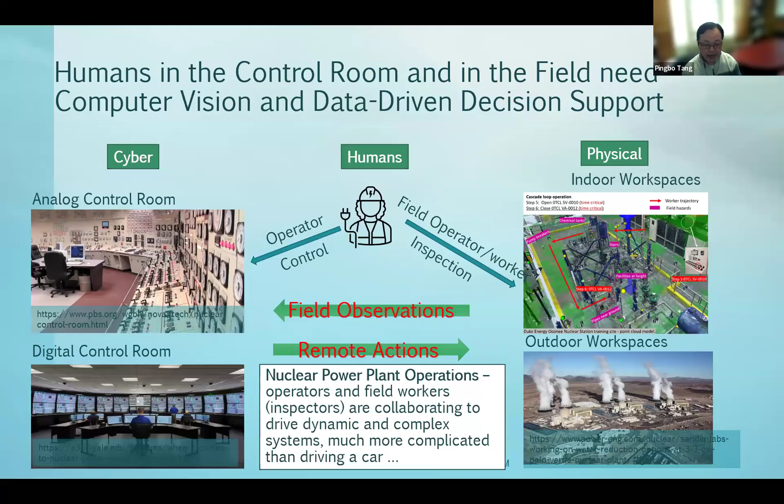Now, the big challenge is there is an interaction between the physical space and the cyberspace, and the humans in the control room and in the field need to collaborate. They need to communicate very well to enable remote operation in an efficient and safe way. So efficiency is important, but at the same time, reliability is also important.

We need to make sure that in the control room, the person who is doing the job is checking the right thing at the right time, and they execute the command in the right sequence. In the field, we also need to look at the operational reliability of the field worker. They are interacting with the physical space correctly and at the right time, and there is no misunderstanding between the control room and the field worker.

When we go deeper into this interaction between different systems and people, we can see that there is this vertical dimension. They recognize things, they make a decision, and they execute the process. If we go to the interaction between human and physical space, it's HP. It's like how the worker does the right things at the right time in the field. HH is a communication problem. It's a teamwork problem. And the human cyber problem is how people interact with a digital model.

For example, today we are talking about building information modeling. We're talking about digital systems for control. So that's the human cyber interaction problem. I'm going to go deeper into this, and to see if we have a more reliable interaction between HP, HC, and HH, then we should have those augmented reality systems.

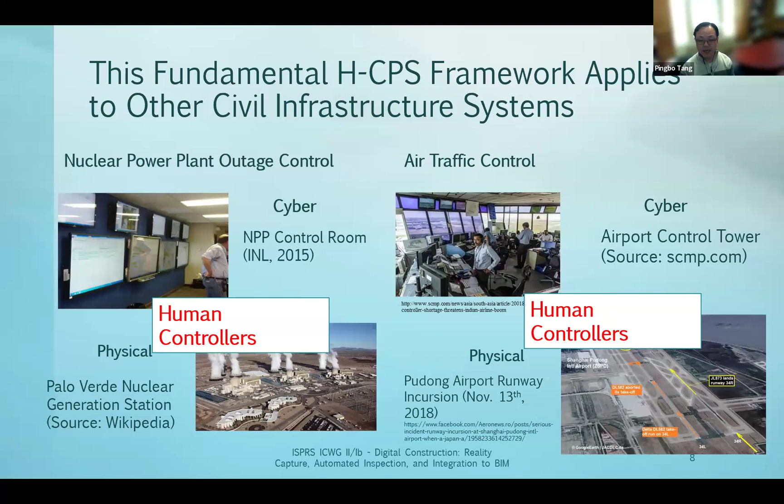So the scenario I just presented is nuclear power plant outage. We also could apply the same concept to other scenarios which also have a control room and a physical space, such as air traffic control. Then from this, we can see that we have the HP problem, HC problem, and HH problem.

For the sake of time, I will give you two quick examples for HP and HC. I will not cover HH, the communication problem, which is a much more complicated domain. Someone else, like Professor Nancy Cooke from Arizona State, has spent her whole life doing this. Let's take a look at the HP problem.

For the HP problem, we can see that in the nuclear power plant field, they provide the information and the sensor is going to feed into a digital model. And the digital model will send control signals back. Ideally, an AI agent should be able to autonomously send out those signals and make sure that the whole thing is operated properly. But sometimes the sensor data might not be reliable, or there's a malfunction of some devices which does not align with the sensor reading.

So we need a field operator, and we need a control room operator. The control room operator is going to use their experience to guide the field operator on what things to check to make sure that everything is okay. Then the field operator is going to check the field and report back to the control room person. And the control room person is going to say, okay, everything seems aligned, then the algorithm should go ahead and do the work.

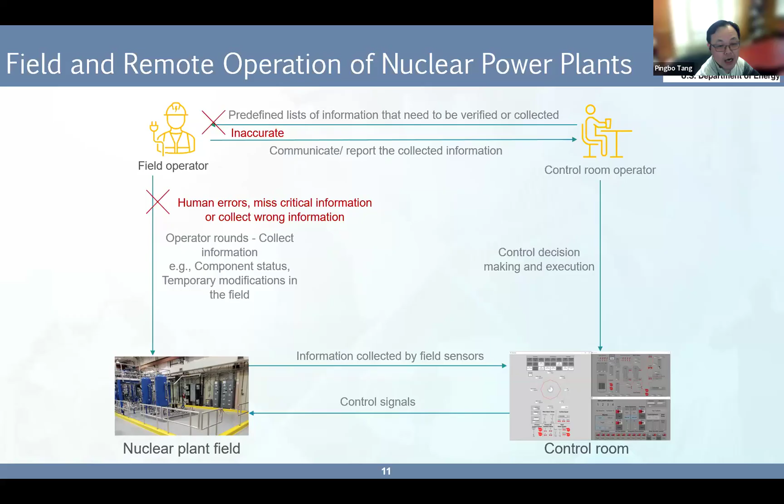Now, sometimes there is human mistake. I would not say it's an error, and it's not just the responsibility of anybody, because by nature nothing is perfect. Humans could provide inaccurate information from the field, or the control room people will provide a list which is not very comprehensive, and the field operator might miss some observations in the field. Then we need to have an additional protection. This additional protection is that we could have AI, artificial intelligence, check the control history and check compliance of the worker's behavior and the machine system's behavior, and make sure that they are compatible.

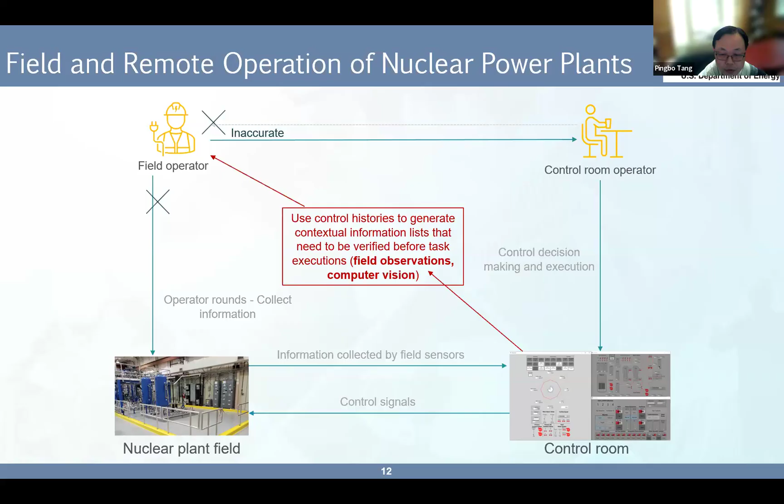So in that way, we can double check: are they doing the right thing, and are they paying attention to the right object? A better situation would be an artificial intelligence system guiding the worker to the right location based on the machine condition, and also having the human use their experience to navigate to the right location, with a double check from the AI. Then the AI will highlight critical objects, identify those objects for every step, and make sure that everything is executed, and that the real-time contextual data is okay.

Then it's not just looking at the current moment, it's also looking at the trend. For example, for the Fukushima nuclear power plant problem, trend prediction is a big issue. They need to know after how many seconds these things will change, and if we can do this thing right now, are we able to do it after 5 minutes?

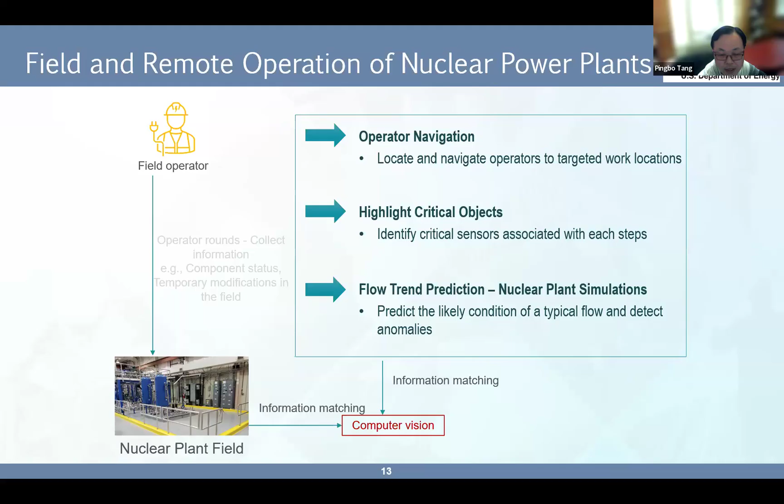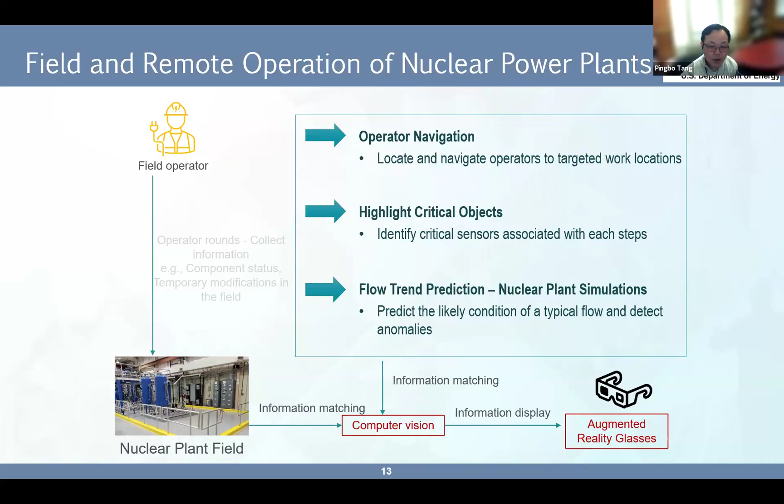So computer vision: many of you are experts in computer vision and photogrammetry. On our team, the expert is Professor Alper Yilmaz, who is helping us collect the video data, analyzing the video data to understand the behavior of workers in the workspace, aligning it with the information collected from the mechanical system, and putting it into augmented reality glasses to remind the worker where to go, what to check, and what the predicted condition is after 5 minutes.

The overall architecture is an integration of digital sensors and digital information models, which you can say is a version of a building information model for a nuclear power plant. And we combine those two together. That's a term people have been using frequently recently: digital twin. We emphasize the digital twin in terms of human-computer interaction, guiding the worker to localize themselves, guiding their attention to the safety-critical objects, and providing them risk information based on the prediction of the system condition and the trend.

Inside this whole system, we need multiple sources of data. That's what I mean by multi-modal data analytics. We have sensor logs. We have human perceptions extracted from surveys and interviews. We can look into inspection reports, operation reports, and accident reports through natural language processing to understand what happened in the past. We can also analyze video data from the human body observing the environment, and from fixed cameras in the workspace observing how humans move. Of course, the augmented reality device aligns humans' location with the physical space to provide a real-time field of view of the critical objects they should pay attention to at the right moment.

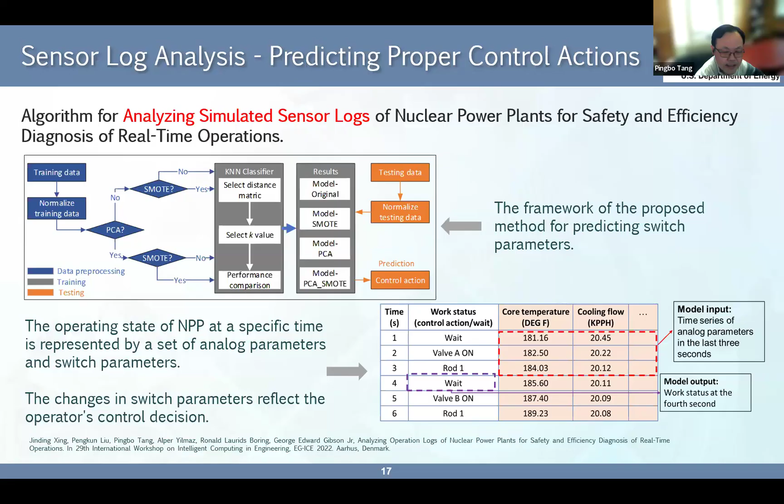And we use a black box algorithm, we cannot achieve very high F1 score. And we are still trying to use ontological explainable AI to do the work. And so far, we only achieve F1 score 0.323 without explainable AI.

So that means we have a lot of work to do to apply new algorithms to understand if we use the sensor data to predict what is the right thing to do at what time, how to augment human explanation about what they're doing and how they choose the timing to push a button and how they choose the sequential observation and the decision-making process to make sure that the process is safe and efficient. It's still a long way to go. We haven't done that yet.

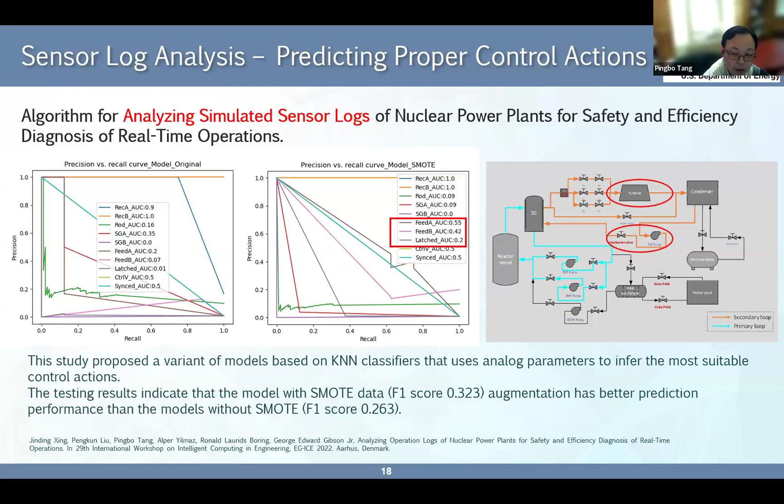Now, to make it explainable, we have to have some semantic information to help us to understand what happened in the past and what we should do. So let me dig into a little bit about those explainability. And this is a picture to show the explanation from the nuclear power plant licensee event report. You can view it as an accident report documenting what has happened and how people do the work to address the problem in the field. And there is, of course, those regulation guidelines. Those are the manuals guiding the worker to do the work.

Then these two parts are natural language-like data. And we could use natural language processing to align the information from the natural language processing algorithm and to understand what is the explanation of the real-time data and what are the explanation of human activities to address the event happening in the field and in the mechanical system.

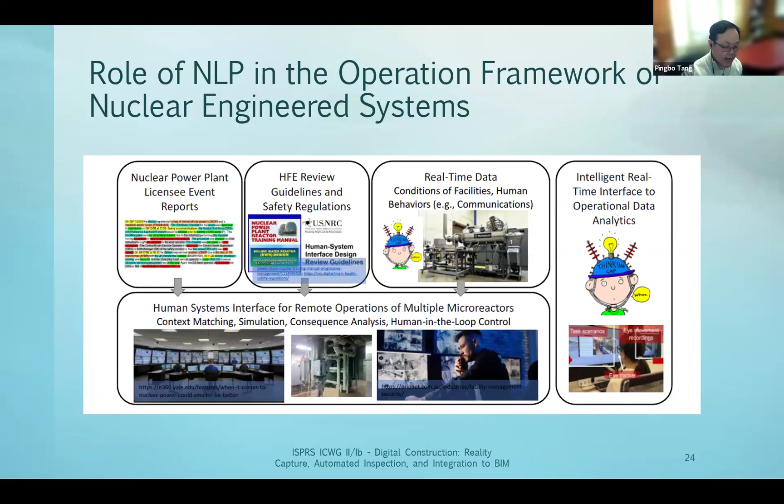So this is one of my students' work, Dr. Jinding Xing. She has been looking at the integration of ontological modeling and developed a representation schema to support function reasoning of the nuclear power plant with some reasoning capability to identify and explain the sensor data.

And in her ontological representation, it's a template to classify objects, which have been represented in the digital model of a nuclear power plant as component, connection between components, and the state of those components, as well as what is the active state and what is the passive state, and what are the times people should be able to push the state of the machine from active to passive, or vice versa.

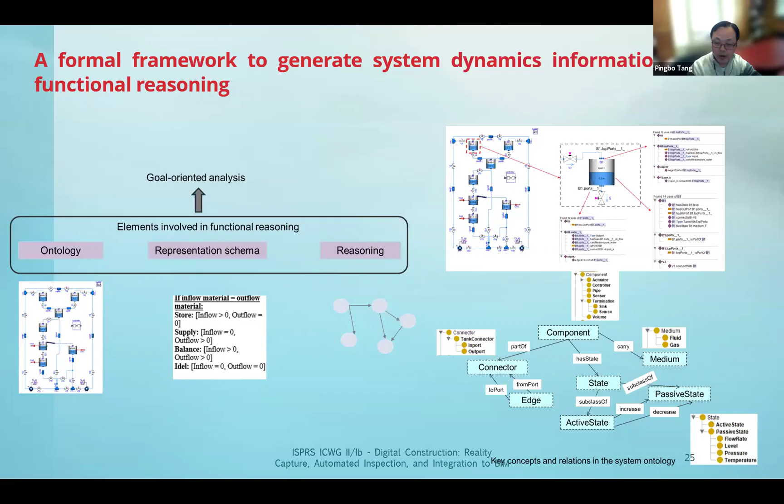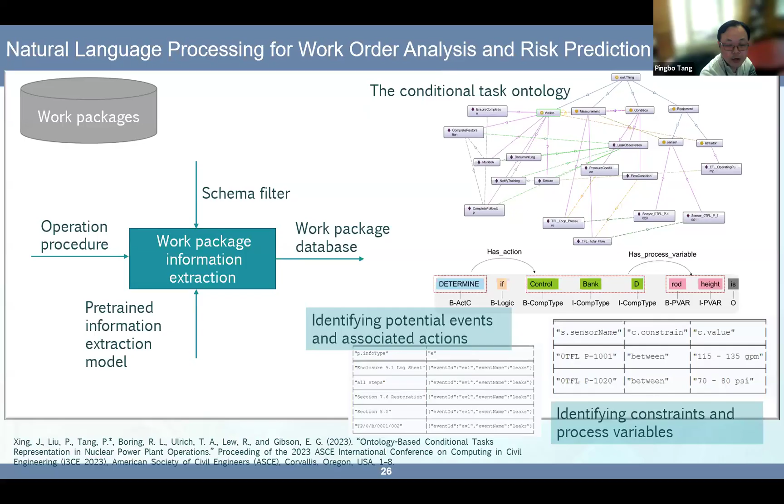So from the historical data, we have those operation procedures and the natural language processing algorithm. This is much older, around 2020, 2021. We use our BERT algorithm to process the operation procedure, to generate a work package database and to produce conditional guidance for the worker to say, what is the condition you should observe before you execute this work order.

Then the new challenge here is we recently worked together with Westinghouse, who is developing the microreactor called eVinci program. They are trying to get the license right now for making the nuclear power plant much smaller for future generations of electricity infrastructure. The natural language processing and ontological models we developed are for the last generation of nuclear power plant. It's called PWR, pressurized water reactor. And we want to translate the accident report, incident report, and operation experiences for the last generation, and to see to what extent we could reuse the operation guideline and experience for the new generation.

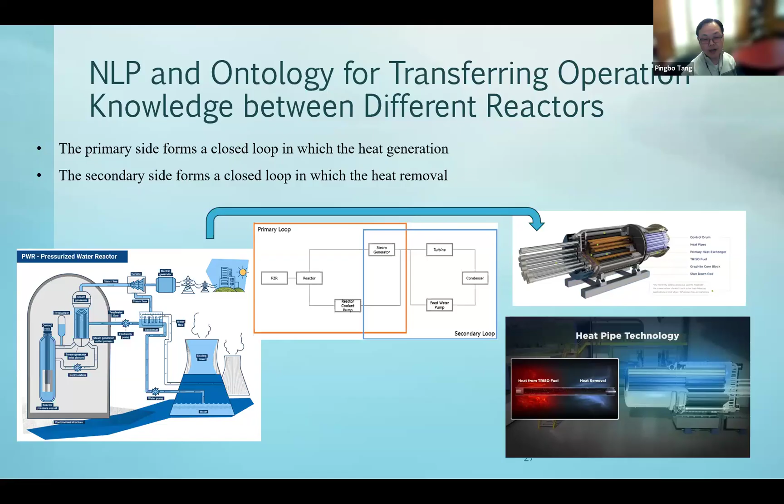We should be able to identify some common functions and common problems, like a cooling system problem. Even though they are using different cooling system designs, physically, they are trying to cool down the reactor, the core, and to figure out what are the possible ways to reduce the temperature, what mechanisms align between the two types of system, and how the worker should be able to transfer their knowledge from the last generation of the reactor to the new generation.

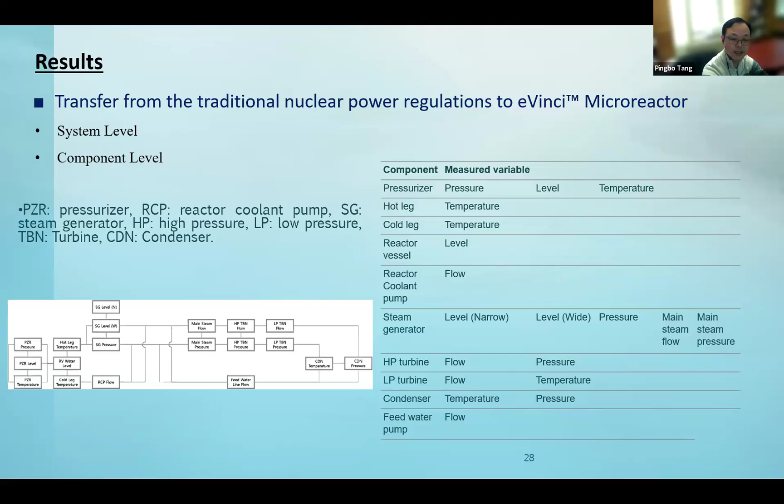So this is ongoing work. We are trying to transfer from the traditional nuclear power plant regulation to eVinci microreactor. At the system level, we look at how many components we have for this larger and smaller nuclear reactor, and to see which concepts align with each other, so that we can reuse some of those guidelines and the inspection procedure, checking procedure, and operation procedure documented in the past. So this is a definition using the ontology to define the entity, state of affiliation, and the causal from the regulation, and to provide the basic boundary condition for safe operation.

And this is the next step. We are trying to build a knowledge graph. It's ongoing work, to use the guidelines and to understand from multiple guidelines published in the past, could we generate a knowledge graph to regulate the operation procedure, and to help the worker to explain what they should do, what they should not do, and why.

Then with this knowledge graph, we go deeper into them. At the moment we see which regulation they come from and what they are discussing, how the procedural items are related to each other, and how they regulate different parts of the mechanical system. Then we put humans in and ask: who are the people, like the supervisor or the field manager, what are they doing, why are they doing this, and based on which item in the procedural definition.

Then we need to go back to the field and see, are they really doing the right thing? We're using computer vision algorithms to help us check, are they at the right location? You can see positioning the worker. This is Professor Yilmaz's work: we input the floor plan, which is a building information model, we have the camera on the human body to observe the environment, and we have the inertial measurement unit, IMU, tracking the acceleration of the person moving in the workspace, to locate based on where you are and your observation, aligned with the building information model to estimate their current location.

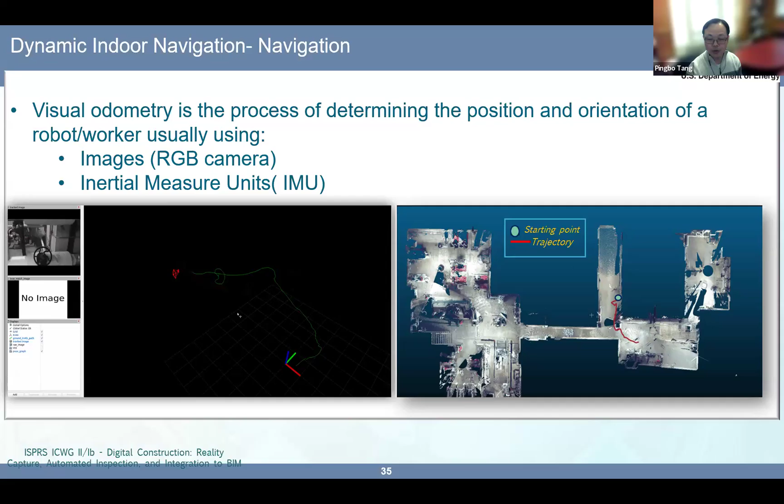So this whole thing is worker location, safe path planning, and critical object detection. Professor Yilmaz's group at Ohio State University developed the integration of the real-time camera on the human body, and utilized a few targets, I call them chessboards, right? They indicate some rough location of a critical object along the way, so that we can calibrate the localization results from the camera only, and we use the IMU, camera, and those target information to improve the localization accuracy for tracing the human location in the workspace.

With that tracing, we then need to provide information. That information relates to another work done by Professor Xiong, who is a professor at Kent State University now. We're looking at an open construction data set. Actually, some of the data set is from the construction domain from University of Alberta, Professor Xiaobo, who is at Michigan Tech right now. We are comparing how those data sets could be augmented by our taxonomy for classifying construction objects, and generalizing how different things, even from different data sets with different names, are essentially about the same safety problem.

Then from there, we can trace human activity and the human body, and understand, if you accumulate some operation knowledge from one workspace, how you can translate that operation knowledge to another space. In this case, we are using this human body tracing algorithm to check where they are and which part of the human body is violating or following the regulation, the safety constraint.

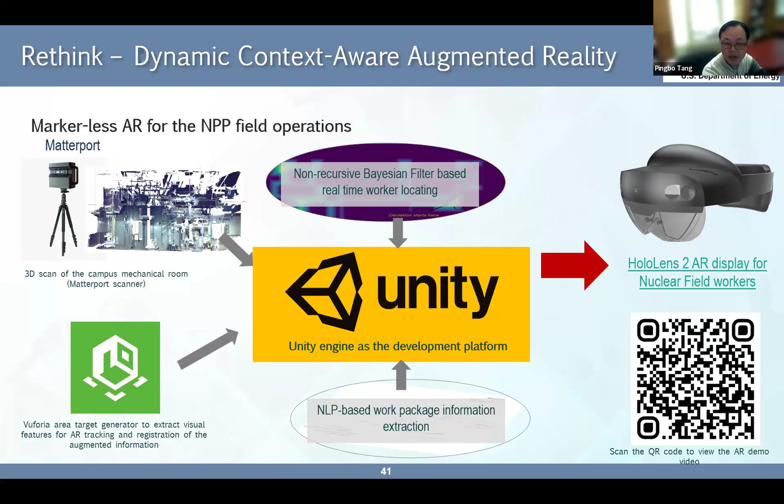Put them together, let's rethink. We have markerless AR for nuclear power plant field operation, and we could have a digital information model to drive the Unity engine to simulate what's going on in the field. We need natural language-based work package information extraction. And we have Bayesian filter-based real-time worker locating to provide information for the worker to understand, based on the real-time situation, where they are and what they should do.

Because of the time limit, I will give a very quick example for the control room, because we just finished the field. For the control room, I'm going to use the air traffic controllers example. We had that accident in January at DC Reagan Airport. That problem is actually because of the ATC. They only had one ATC, and the communication between the air traffic controller and the pilot had a small problem, and that caused a situational awareness misalignment between the pilot flying the helicopter and the person flying the American Airlines aircraft.

One thing we have been doing in the past few years is tracing the talking behavior of people who are communicating with each other, for locating where they are and what is in the neighborhood.

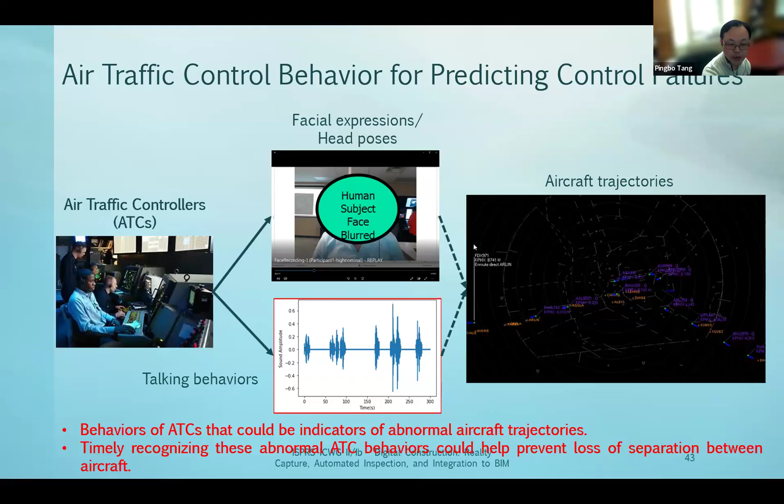And we want to timely recognize those abnormal situations and to help prevent the loss of separation between aircraft. We did some experiments with 6 experienced ATCs with a simulator at Arizona State University. Professor Nancy Cooke, she is the major person doing this research. And we did the experiment with a baseline situation, high workload situation, and high workload off-nominal situation.

For the high workload, the only difference is we have more aircraft in the sky, like 30 in total. The difference between off-nominal and the high workload is they have distractions. Distractions, for example, the weather condition influences the path of the aircraft, or the runway allocation has been changed, and you are supposed to go to another runway, not this one.

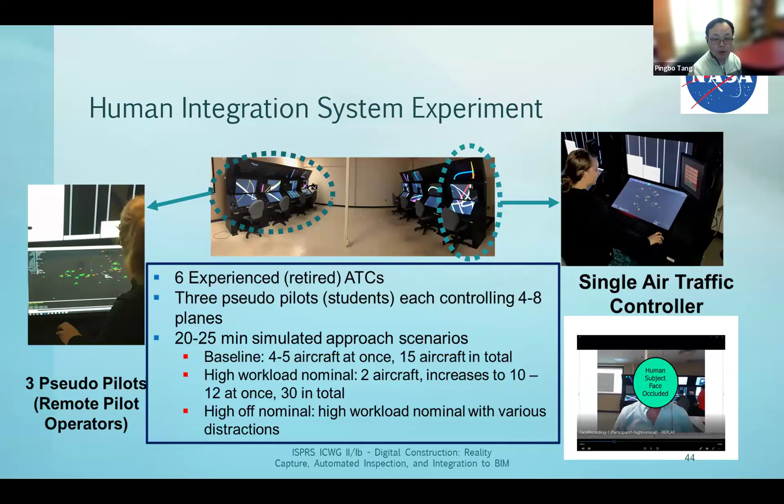So we did a lot of experiments, and this is the multi-modal data I mentioned before. And I would like to emphasize the importance of not just using computer vision. We need to augment computer vision with multiple sources of data like an ECG headset to measure the heartbeat interval. And we also need to have the sensor data tracing the location of many aircraft from the GPS signal, and use the video data.

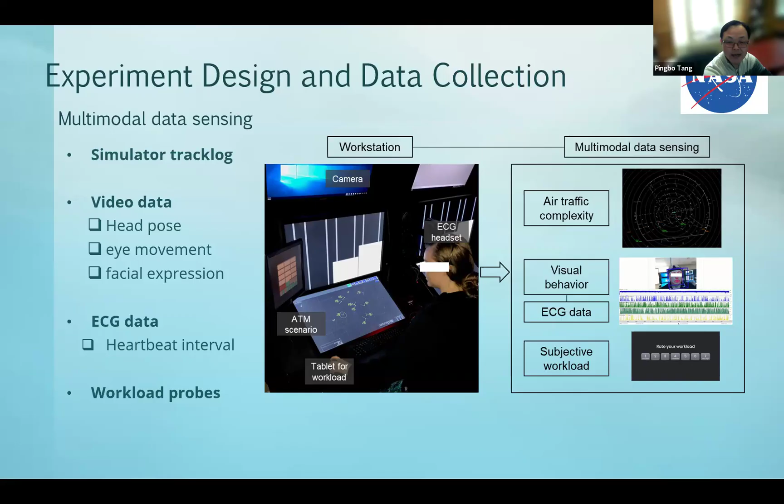Of course, we can trace the head pose, eye movement, facial expression of the person, to understand how complicated the situation is, what is the person's workload, and how likely they are going to make a mistake. Then this is the bigger picture: we need to know to what level a complicated task with very dense traffic, with an off-nominal event, is going to influence the cognitive workload of the person and their operation performance.

Loss of separation means two aircraft getting too close to each other. And our experiment actually showed that in the off-nominal situation, which is number 3 here, the workload, the vertical axis, does not increase too much, only slightly compared with the high workload. So what does that mean? Even though we have some distractions when people are very busy doing their work, some tiny distraction doesn't influence their mental workload too much.

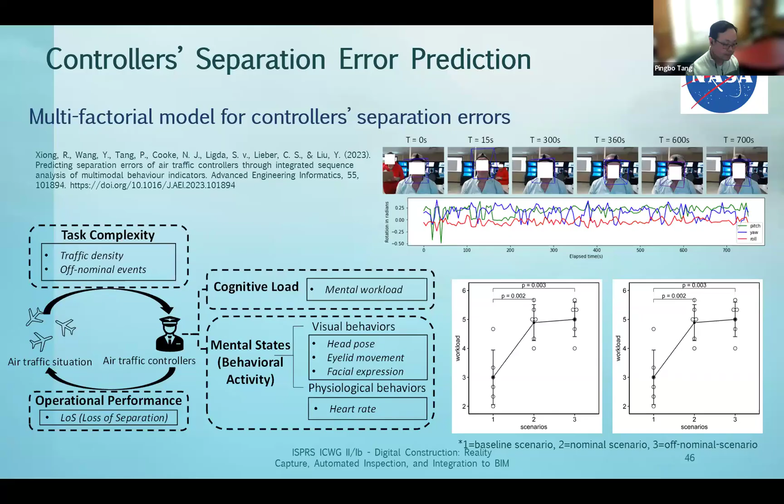And we also tried our LSTM algorithm to analyze the facial expression time sequence, heart rate time sequence, and also the head pose time sequence, to see if there are any patterns of human behavior that can help us predict which sequential behaviors are more likely to lead to mistakes.

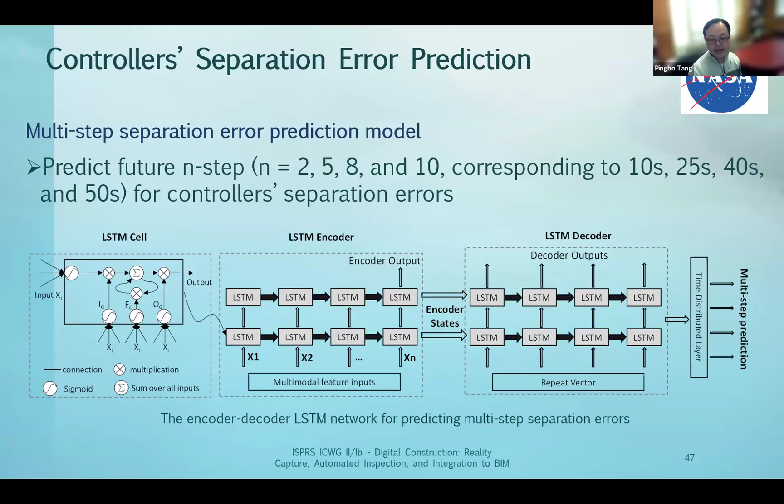This is some very quick result, I'm going to conclude very soon. We can see that if we want to predict in the next few steps how likely humans are going to make mistakes, we can predict further and further into the future. One step in this case is 5 seconds. So 2 steps means we're predicting what's going to happen in the next 10 seconds. 10 steps means what's going to happen in the next 50 seconds.

Of course, if you predict further in the future, the precision is going to decrease, and we repeat the algorithm many times for a few scenarios. Plus minus means sometimes the algorithm is better, in some situations the algorithm is not so good, so plus minus is the fluctuation of the performance. So statistically, we can see that for 2 steps, which is a near-future prediction, we don't need heart rate. And further into the future, heart rate actually contributes to the accuracy.

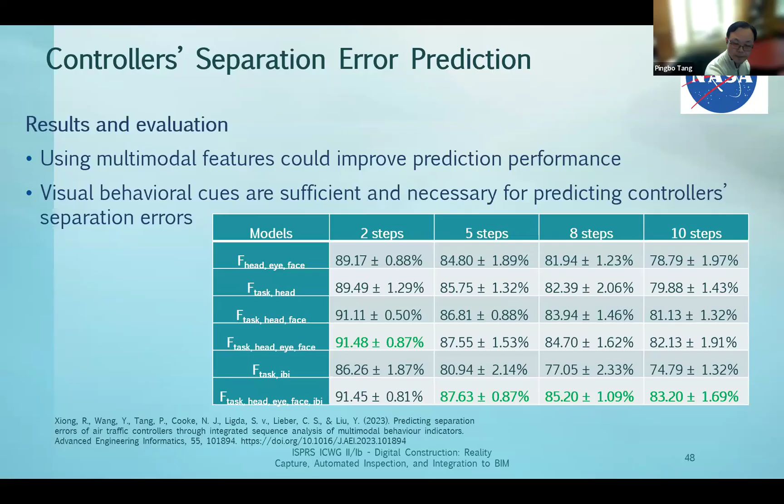To conclude. The main problem: we look at the historical data, regulation, real-time video data for computer vision. And we are looking for a real-time support system for the operators of civil infrastructure, such as nuclear power plants and airports. And we want to have an intelligent real-time interpretation for the human to understand what's going on in the field and what they should do now.

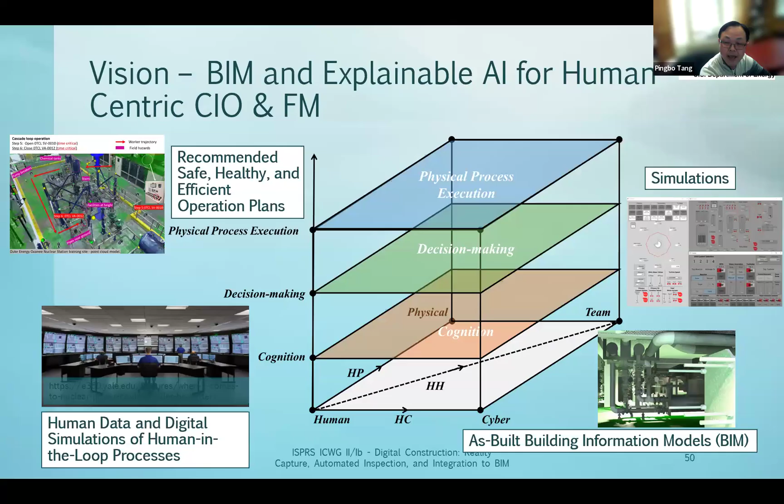Back to this, we have a building information model, and we have human data. And we need to recommend what is the safe, healthy, and efficient operation plan. And we also have simulation to predict what's going to happen in the next few minutes.

Maybe take a couple of seconds, right? Let me see if I can see the results somewhere. Okay. Seems I cannot see the results, but anyway,

there is some ambiguity actually in the description here, right? Because the meaning of this agreement flag may cause confusion for two reasons. Number one, normally in our common practice or common knowledge, true is used to refer to the positive case, which means the direction the normal points into.

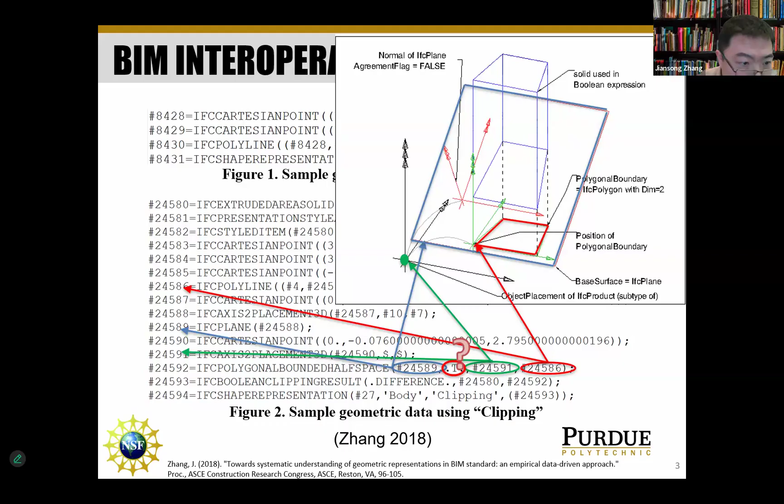And point number two is the potential ambiguity of the phrase "away from," which is caused by the unbounded nature of the half space, because for both the positive case and the negative case it seems reasonable to say it is the one the normal points away from, considering that in the positive case, the half space can be regarded as the departure of the normal. And obviously, without rigorous testing, such doubts are not easy to clear. So how can we clear such doubts? We can apply a data-driven approach.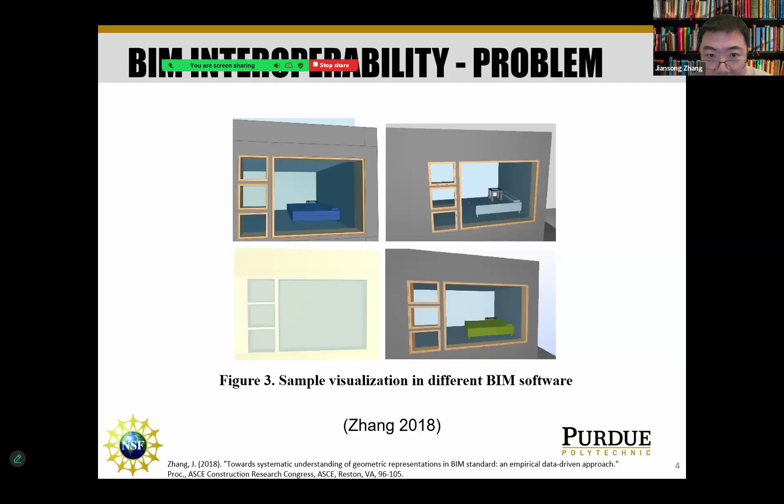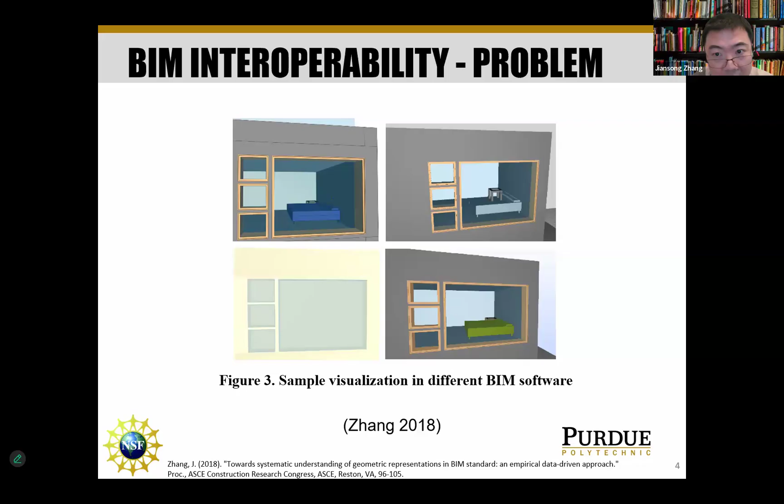Let me move to the next slide here. Another problem related to interoperability is that even the very fundamental 3D representation of an object or of a project, as you can see in figure 3 here, can render very different results in different BIM software or BIM platforms. This might be surprising because the 3D representation in building information modeling is supposed to be the most mature and developed part, right? But still, you see the interoperability problem.

So a couple of years ago, we took this IFC data and IFC schema with some due diligence. We can actually generate a systematic understanding of the IFC schema in a much clearer way, which can help us further develop BIM utilities and tools to analyze the IFC data.

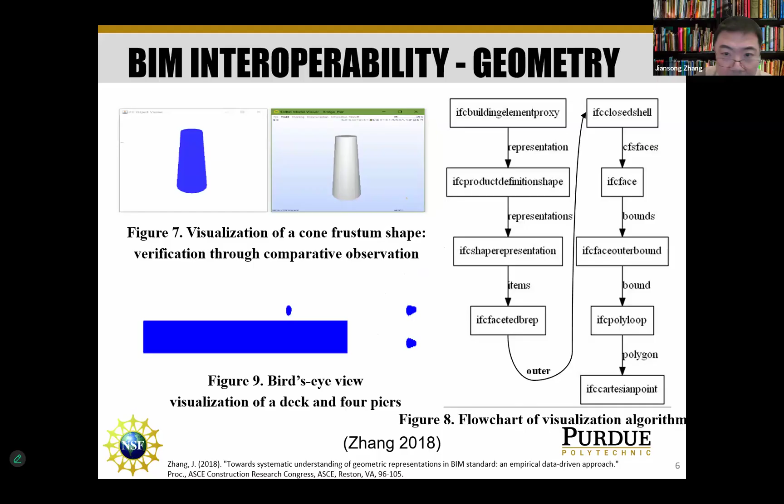So we did a very small experiment by taking a very simplistic bridge model with 4 piers and 1 deck, and tried to build a visualization algorithm. As you can see in figure 7, at the beginning, we start with visualizing one of the bridge piers, which is relatively straightforward, by analyzing the 3D representations of the IFC objects.

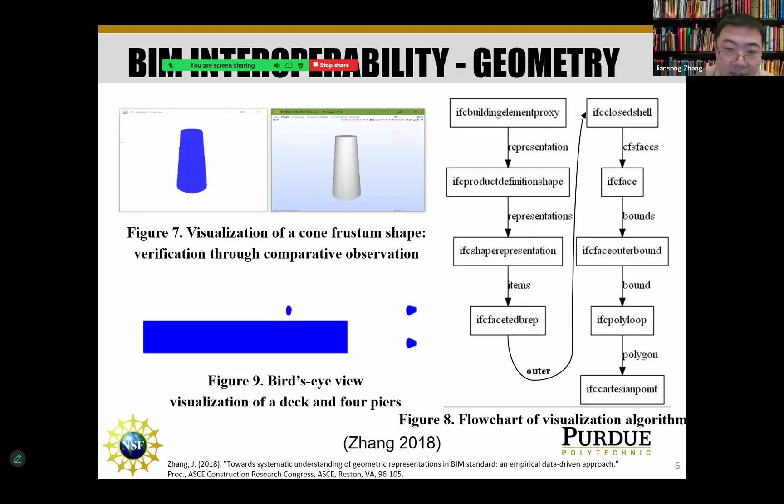Which is shown in figure 8. We're not gonna go into detail. But then if you look at figure 9, we can see that the bridge piers at the beginning, the visualization actually shows them not really attached to the bridge deck. And that was because at the beginning, we didn't really take into consideration the IfcAxis2Placement3D, which was the entity used to represent the placement of the objects.

Okay, so then with that testing, we identified we need to take that into consideration. So we did. And then figure 10 shows after that, we can successfully visualize this bridge. And at the same time, we can also generate a much clearer systematic understanding of the entities in the IFC schema that are used to represent the 3D shapes, the 3D geometry, which are shown in figure 11 here.

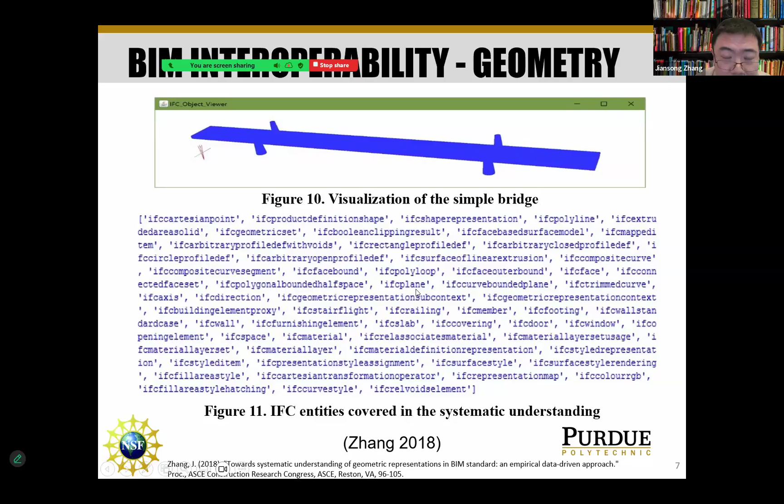So in the end, with this iterative, data-driven development and refinement, we were able to create a visualization algorithm that is comparable to the commercial platform. So you can see the results from our visualization algorithm on the top and a commercial platform visualization at the bottom on a duplex apartment building project.

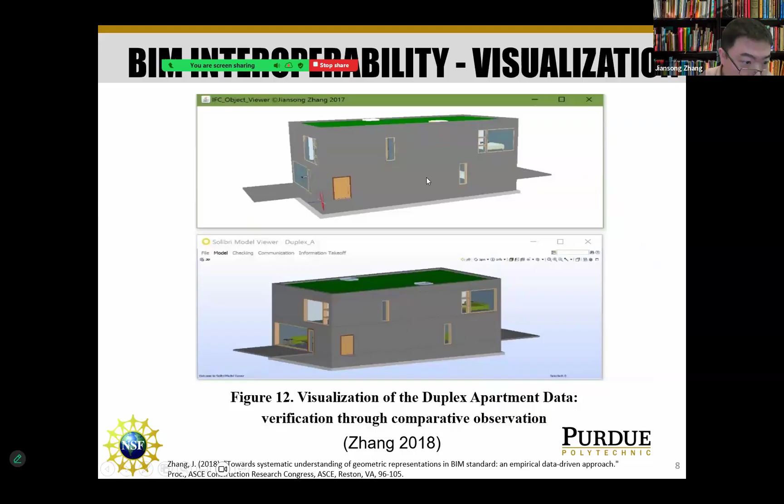So obviously the geometry is part of it. So we have the 3D representation, the 3D shapes. That's the first category. And then the second category, we also need to look at the locational information, so where is one object in relation to another object. And the third category is the material and mechanical properties. So this is the definition that we have created.

Invariant signatures of an AEC object, we define as a set of intrinsic properties of the object that distinguish it from others and that do not change with data schema, software implementation, modeling decisions, and/or language cultural context, which means it doesn't matter which part of the world this is being used. A wall is a wall, a door is a door, right? Whereas the invariant signature should uniquely describe the object and provide all the information needed for the various analyses.

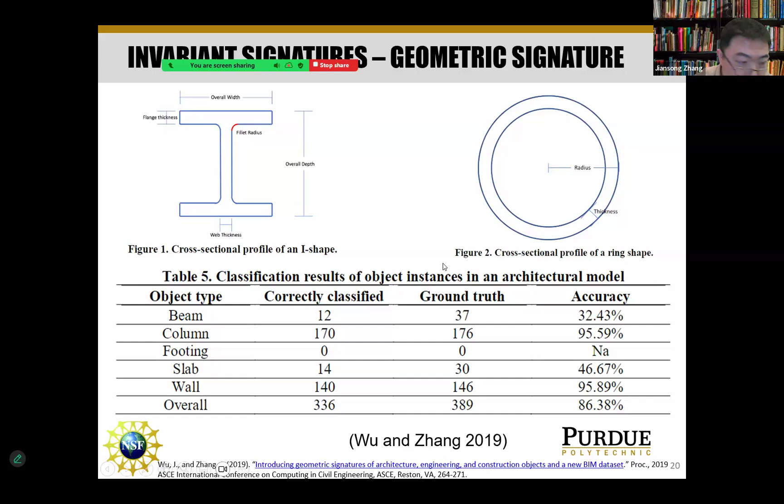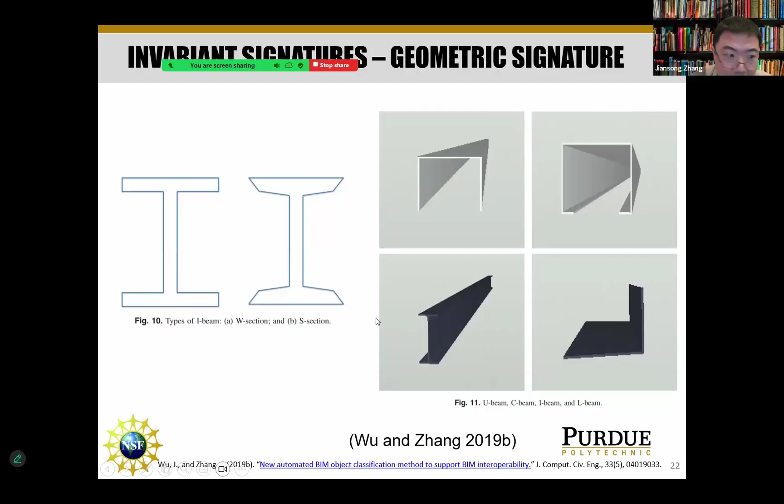So our algorithm will process each of the alternative 3D representations differently, and then for each representation, we identify those invariant geometric signatures, and then the algorithm can, based on the values and value ranges of those signatures, decide which type of object it is. All right, so these are just some example types of beams. We have C-beams, U-beams, I-beams, L-beams, etc. that were covered in our study.

But through our experiment, we actually found when it comes to a finer level of granularity, our invariant signatures can work even better, which means the accuracy can be close to perfect. And we also developed an algorithm to identify a truss.

And when it comes to a truss, it's not just one simple 3D object, but it's a composition of multiple objects, right? Because you have the web, you have the flange, and the different components, and you need to take all of that into consideration. So the algorithm on the right shows how we decompose these trusses into different objects and try to identify each type of object. And once we identify each, in the end, we'll be able to tell, okay, overall, this is a truss.

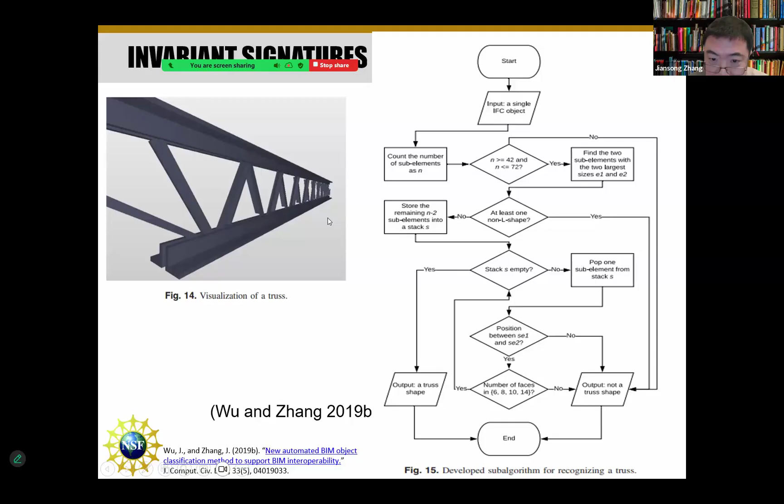Guess what? That was because the geometric shapes of these two objects are very similar. They're pretty much just cylinder shapes, right? So the shapes of these footings, or we'd better call them foundations, in the experiments were similar to the columns. And that was why we incorrectly classified them into columns, which means the geometric signature itself sometimes is not sufficient when it comes to similar shapes between different objects.

But we can address that by adding the locational signatures, right? Because the foundations will usually be below ground, and the columns will usually be above ground. So that can easily resolve that.

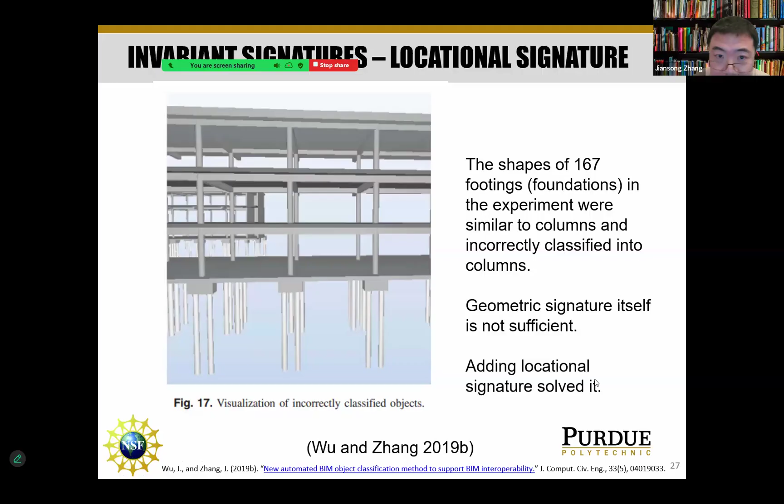So we take the invariant signatures methods and concepts and the algorithms that we've developed, and we try to apply it to a real scenario between architectural design and structural analysis. And in this case, when it comes to structural analysis, the material and mechanical properties of the objects will be important, right? So we have to include those into the consideration.

So in addition to the geometric features, including the shapes and the location that we have mentioned earlier, now we also have the material properties listed here, such as the mass density, Poisson ratio, shear modulus, thermal expansion coefficient, compressive strength, and Young's modulus.

So we take this 5-step method. First of all, we define the problem to be between the architectural model and structural model. We would like to see the automated conversion, right, directly from the architectural model to the structural model. To achieve that, first of all, we collect the data for both types of models, and we process those models using our invariant signatures theory.

We generate those invariant signature features, and then we train and test invariant signature-based machine learning and rule-based algorithms to help us perform that conversion automatically. And this can be an iterative process because you never get it right the first time, right? You've got to improve it over time. So after a while, when the performance is relatively stable or meets our predefined criterion, then we can take it to the final evaluation.

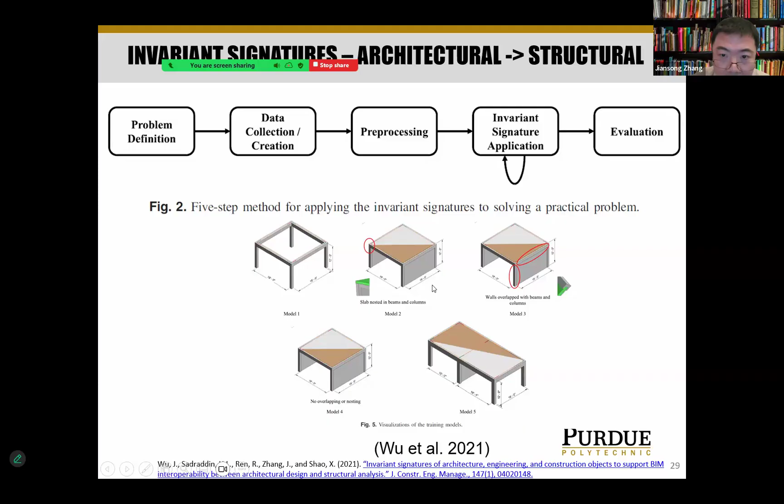So figure 5 shows the simple models that we have used for the development of those conversion algorithms. You can see these are some very simple 1-bay or 2-bay structures with or without slabs or walls. And then we use slightly more complex models for the testing, right? Just to challenge our algorithms.

And then we also took it to a real project. So this was a 2-story penthouse reinforced concrete commercial building. The building is for a medium-sized grocery store. It is 31.70 meters long and 21.60 meters wide. And due to the topography limitation of the building site, the first story is a semi-basement and used as a storage place. And then the second story provides the main shopping area.

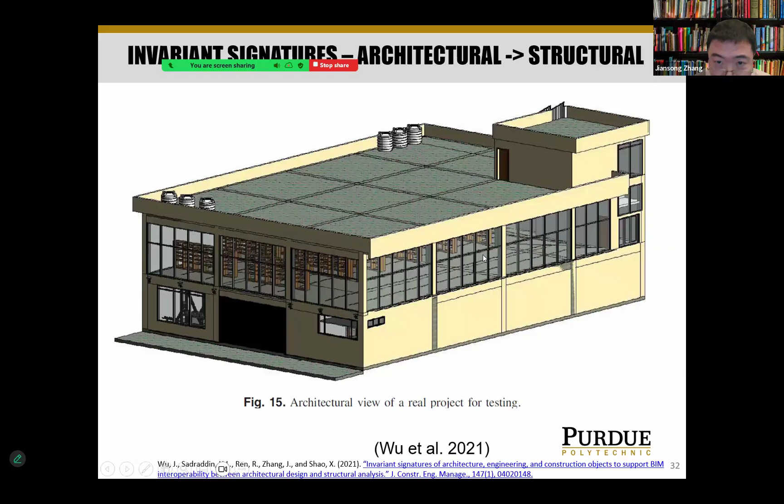The results of this evaluation are shown in table 9 here. So as you can see, ultimately on this real project evaluation, our conversion algorithm achieved relatively good precision and recall, right? Both above 90%: the precision is 98.4%, recall is 94.9%.

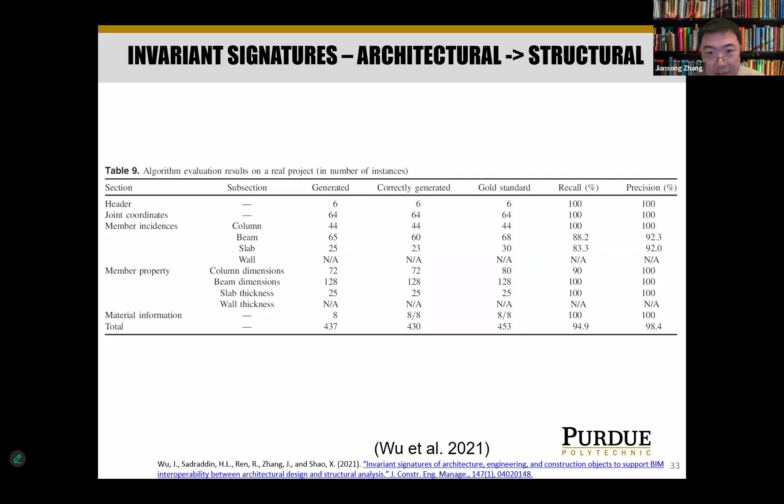So it's a pretty good result, which means we can actually leverage the invariant signature-based conversion algorithm to help us create the structural analysis model based on the architectural model. So you don't have to restart or create it from scratch every time. However, because the results were not perfect, we looked into the errors to see what kind of errors we had.

One scenario is there were some incorrectly generated slabs because of their stair openings. This was simply because this was not in the training data, if you remember, right? In the training data, we only have some simple 1-bay and 2-bay structures with or without slabs and walls. We didn't have the staircase. So then it's just an issue of, okay, once we add this scenario into the training data, we will be

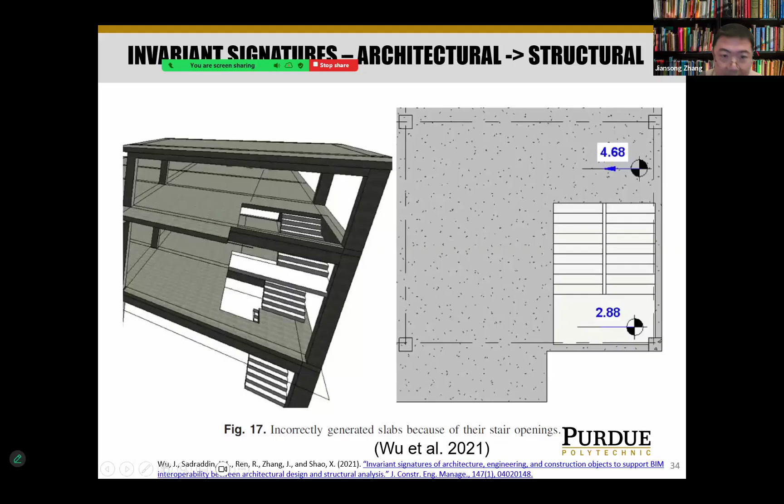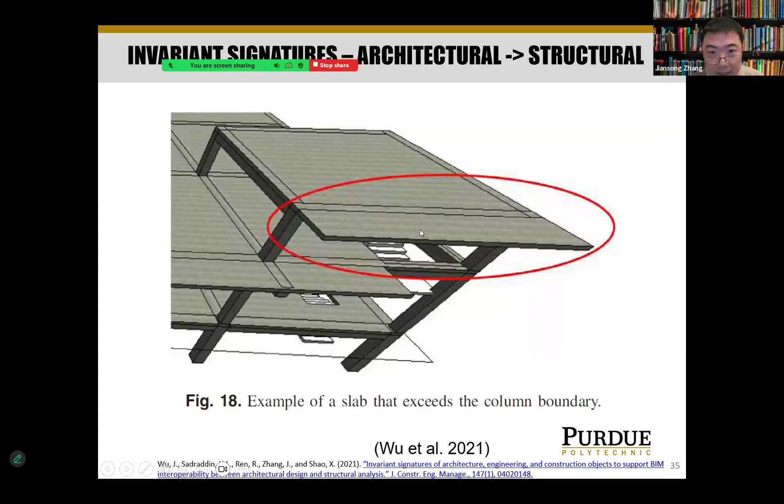So to conclude, just for the sake of time, we have an invariant signature theory with initial geometric and material signatures that can be used to capture the essence of architectural engineering construction objects to be used in the various engineering analysis model exchange tasks.

So we don't have time in today's presentation to cover the other scenarios, but we actually already tested it in, let's say, interoperability between architectural modeling and cost estimation, between architectural modeling and building energy modeling and simulation, between architectural modeling and building code compliance checking applications. So we have already tested in various scenarios, and we all achieve very good performance like what you have seen.

So the theory goes beyond the state-of-the-art of AEC information representation, which was based on mainly the data schema, and it enables the robust AEC information representation, which is agnostic to software implementation, modeling decisions, and or language cultural context.

So this advances the empirical knowledge as well in the area of BIM interoperability by offering a new data-driven method to use invariant signatures for solving practical problems in BIM applications, because this can support the many-to-one paradigm of BIM interoperability and brings the seamless and universal BIM interoperability one step closer to the reality.